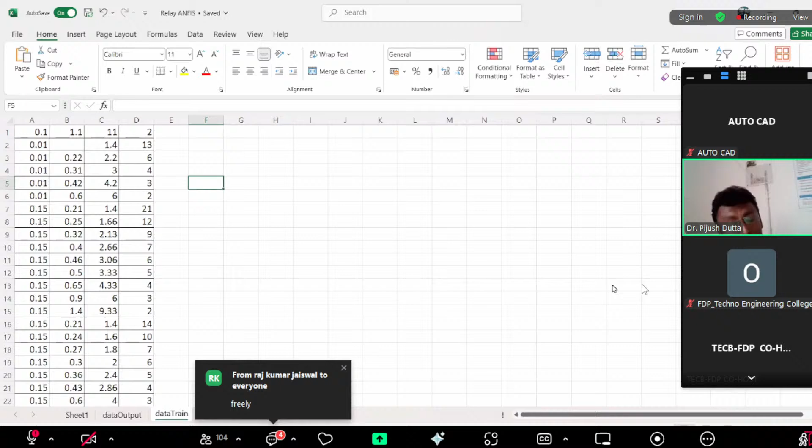At the same time, if I further tune the ANFIS, like the membership function of the fuzzy inference system, in that case I also add PSO-ANFIS, or you can use GA-ANFIS, that is particle swarm or genetic algorithm integrated with fuzzy ANFIS, or flower pollination ANFIS, bat ANFIS. This kind of optimization algorithm can also be used for further tuning of the fuzzy inference system in an ANFIS model. I have already performed this kind of optimization research.

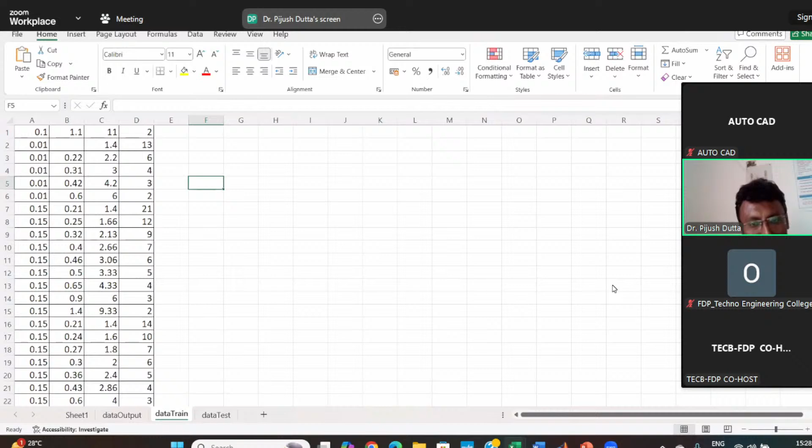But as my session is regarding simulation, I will avoid this part.

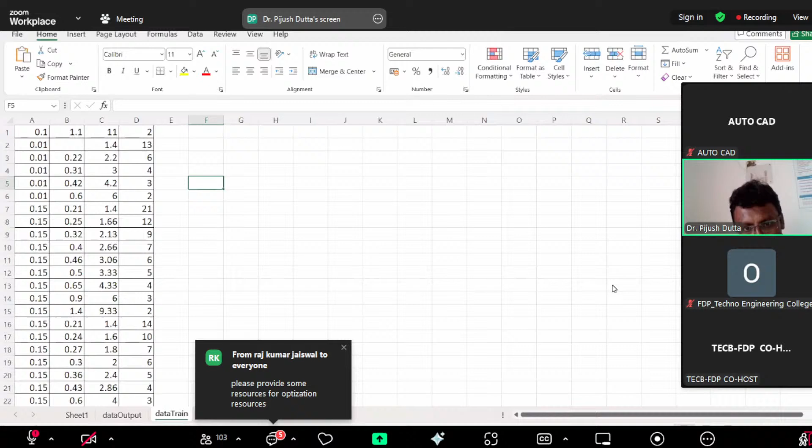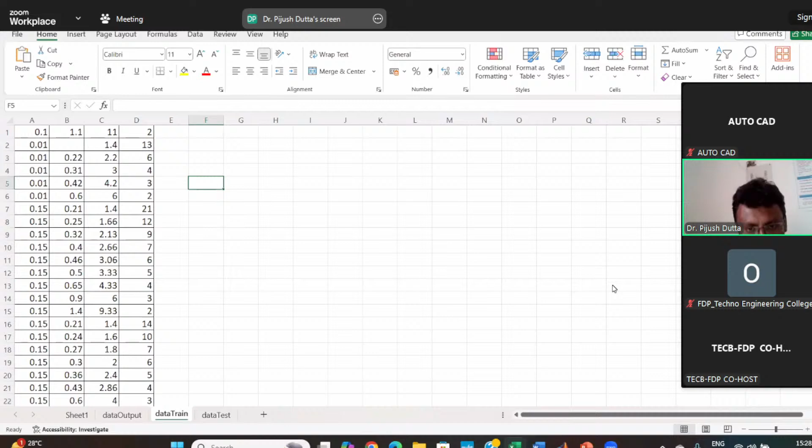Actually, in optimization, some sources mean that in the MATLAB library you can get the code, but this code is not actually viable as is. You have to change the code according to your requirement. If you know programming languages like C or C++, and you have experimental data, you can change the metrics of these already available algorithms.

But some algorithms you can also design, like implementing two algorithms, for example elephant swarm optimization - these are actual hybrid algorithms. Some algorithms also use a hybrid of evolutionary algorithms, like genetic algorithm and particle swarm optimization. Generally, in most cases, some algorithms can provide the optimal result because they give very fast convergence speed.

After executing the instruction, it very quickly reaches a stable condition. In some cases the algorithm takes a longer time, so I can choose two algorithms and merge them to get a hybrid algorithm. This kind of algorithm can be implemented according to the nature of your experimental data, so there is no particular single source for the optimization algorithm or MATLAB tool.

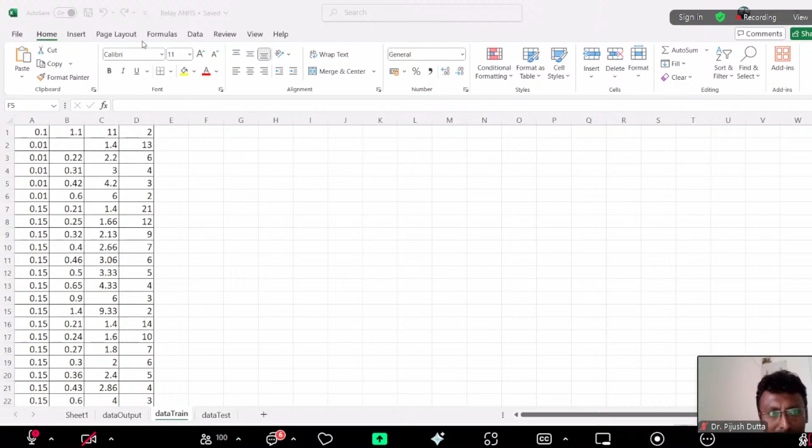Thank you, madam. Can I leave? Thank you, sir. Yes, sir. Thank you all.

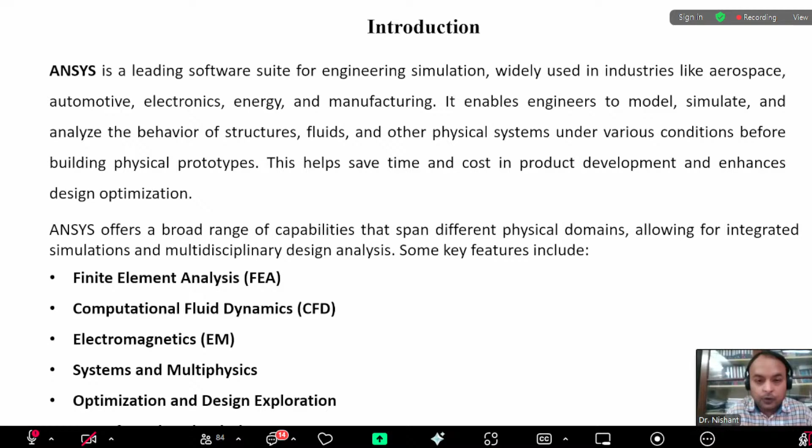It also deals with fluids and other physical systems. For fluids, computational fluid dynamics is an important analysis in ANSYS, which we will discuss in this session, along with other physical systems under various conditions before building physical prototypes.

Suppose we have developed a prototype and fixed the boundary conditions depending on our need - the need of the industry or the need of research - we simulate it using this ANSYS tool with the help of either FEA, finite element analysis, or CFD.

So why is it necessary to simulate such prototypes before doing an experiment or going to field work? Because it helps researchers and industry - it saves time and cost, both of which are very important in product development, and it enhances design optimization of the system.

ANSYS offers a broad range of capabilities that span different physical domains, allowing for integrated simulation and multidisciplinary design analysis. Some key features include finite element analysis, computational fluid dynamics, electromagnetics, systems and multiphysics, optimization and design exploration, and manufacturing simulation. There are many more, but these are the key features of ANSYS design analysis.

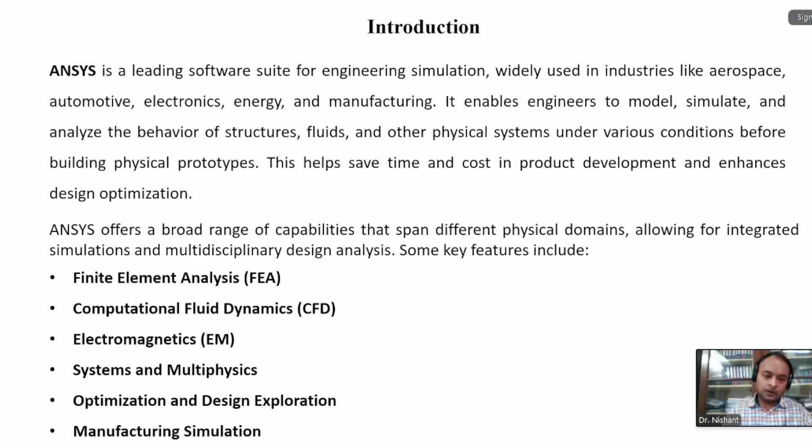When we start and go to ANSYS, the basic thing we need to know is ANSYS Workbench. So what is ANSYS Workbench? It is developed by ANSYS USA.

It is a computer-aided finite element analysis tool. In the graphical user interface of ANSYS Workbench, the user can generate a 3D and finite element analysis model, perform analysis, and generate results of the analysis.

So when we go to the workbench of ANSYS, we see there is a list of analyses that can be performed in this tool. The first one is design assessment - the assessment of the design can be done in this analysis in ANSYS.

Then there is electric, explicit dynamics, fluid flow, fluid flow CFX, and fluid flow fluent. There is a minor difference between CFX and fluent or fluid flow, which we will discuss in the coming section.

Then harmonic response. Next is IC engine - if we go for the IC engine, detailed analysis of the IC engine can be done using this analysis system of ANSYS. We also have linear buckling, magnetostatic, modal, random vibration.

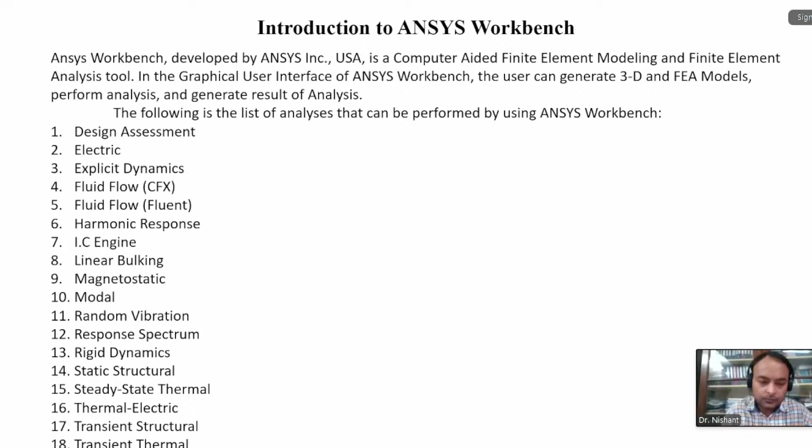Response spectrum, rigid dynamics, static structure - static structure is also one of the important analyses in ANSYS. Then steady state thermal, thermal-electric, transient structure, and transient thermal.

Now, when we start with ANSYS, how should we get this ANSYS onto our system? Before installing ANSYS on your system, it must have good configuration so that the simulation doesn't get stuck at the time of working.

It is recommended to have a system with good RAM—more than 4 to 5 GB is basically needed for ANSYS—and a good operating system. The latest, if you have Windows 10 or 11, you can use this ANSYS system onto your system very easily. Besides this, if your system provides a good graphic card,

that will help to analyze the good picture of the simulation results, which can be visible in a very good manner. So the graphic card is also one of the most important components for your system to install ANSYS in your computer or laptop, whatever you have.

So when we go for the ANSYS workbench, when we go for the start, we see the workbench. Now, from where can we download this ANSYS? This is very important. From the official website of ANSYS, we can use the student version of ANSYS. The latest version is also available there. You can go through it.

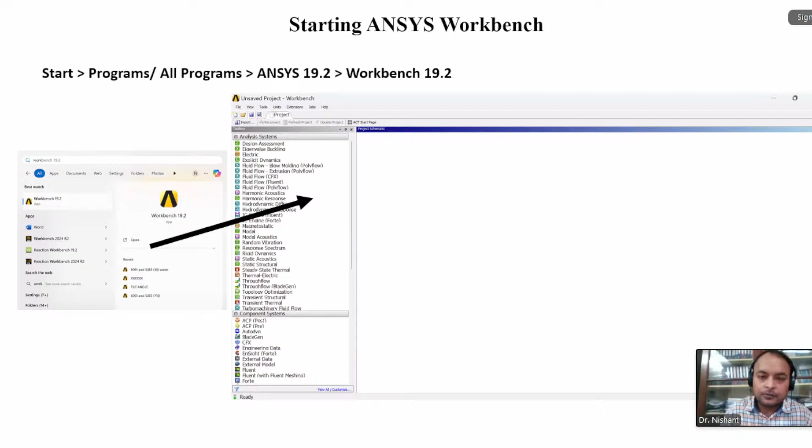These are some of the analysis systems, and beside that there is a component system. This helps the analysis system for further analysis. For example, there is ACP post, pre, Autodyn, CFX, engineering data, and so on. Whenever we click to the workbench, the window will look like this, and we will go for the next slide.

So what does this window represent? This window represents, first, the title bar, where you can rename your data, where you can rename your file or save it with whatever name you want.

Then in this title bar, there is a menu bar, which has File, View, Tools, Unit, Extensions, Jobs, Help. In File, we can open it, save it, as we can do in a particular system—that's all the features available in this. You can open it, save it, export it, import it, whatever you want.

Similarly, there is the next section—the project schematic view window, or project schematic window. What is this? Whatever analysis system we are going to use, we will just put it into this project schematic window. How will we put it?

Just go and click, for example, if I'm talking about Static Structural—we go on Static Structural, just click on it, or we will drag it to the project schematic window. That window will open up a pop-up of a static structure, which has different menu bars in that particular pop-up, which we will see in the next slide.

Besides that, this is known as the toolbox—a toolbox in which the analysis system, component system, custom system, design process, etc. are represented. Now, one of the important things in this window is the status bar.

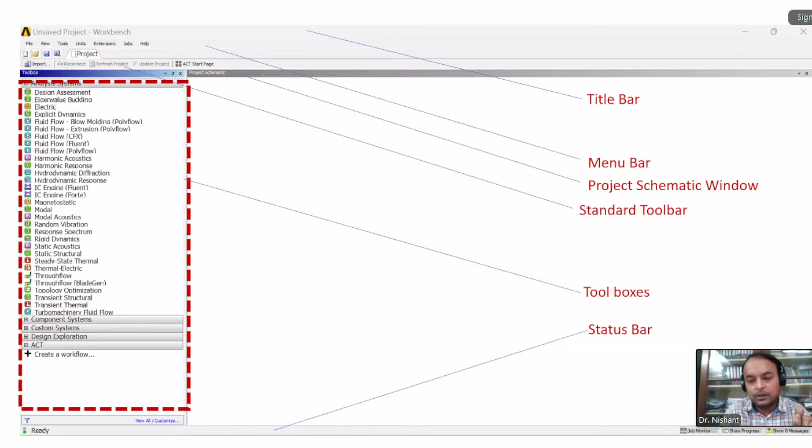What is the main error in your simulation? What is the main need? What do you want now? It will give a little hint to you at every point of your analysis.

Now, in the toolbox window, see on the left hand side we have the analysis system.

The first is the design assessment. What is it used for? It is used to perform a combined solution for static and transient structure analysis. Suppose a particular researcher has to perform a combined solution for the static and the transient structure analysis, then he or she will use this design assessment.

Similarly, for electric, it is used to analyze the steady state electric conduction. For explicit dynamics, it is used to identify the dynamic response of the component under stress wave propagation or time-dependent load or impact. Coming to fluid flow CFX, it is used for analysis of compressible and incompressible fluid, and to analyze heat transfer in fluid.

Next is the harmonic response. This is basically used to analyze the system working under periodic or sinusoidal loads.

The next is the IC engine. It will determine the performance of the whole system of the IC engine. You can use the prototype of the IC engine for whatever analysis you want to do. It will give the complete performance of the whole system. For using this, you can use Fluent or Forte, depending on the necessity of your analysis and the need of your research, which all depends on your objective.

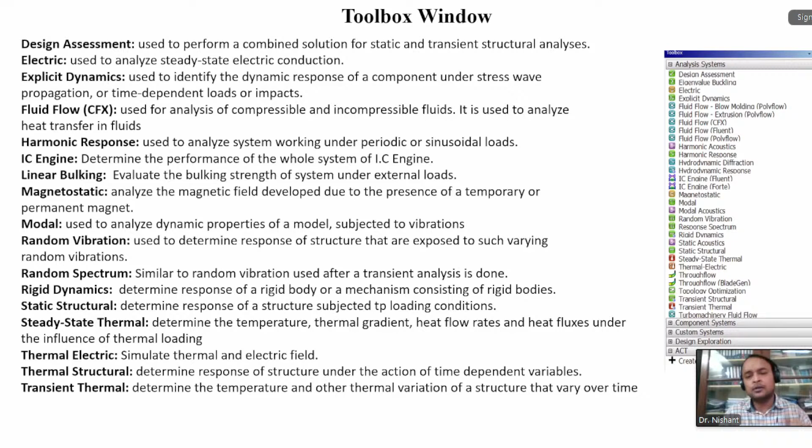So whatever analysis system the researcher or industry wants, you can simply click it and go for further analysis. Now, the next is the component system.

What is the use of this component system? These are the basic blocks of the project. Whatever geometry you have made, this is used to analyze systems such as geometry, which is used to create models for your analysis. Then we go for mesh, which is used to generate the FEA model. Then we use it to visualize the result of ANSYS in the desired form.

Next is the custom system. It is used to carry out a standard coupled analysis in which the input and output data of one analysis is used as input for the next analysis.

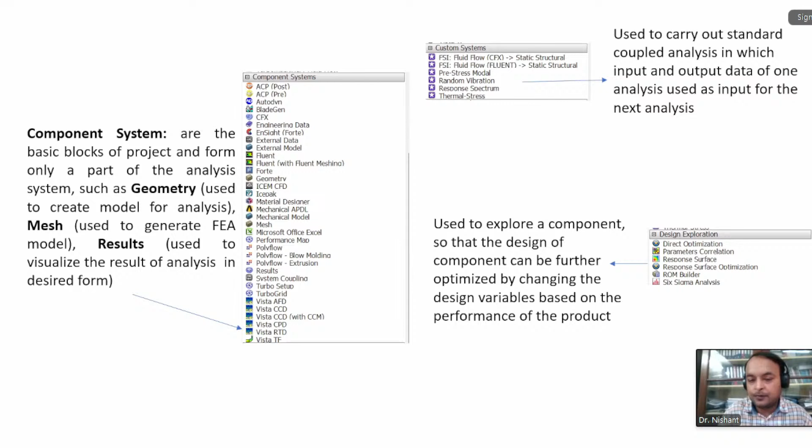There is one more section in the toolbox, that is design exploration. It is used to explore a component so that the design can be further optimized by changing the design variable based on the performance of the product.

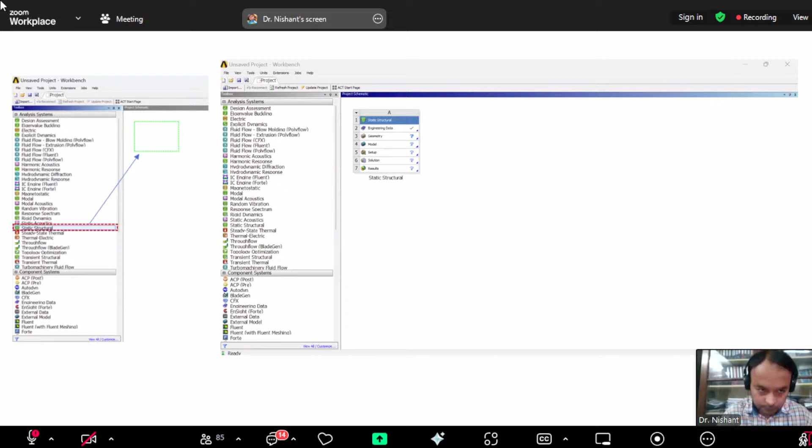This is the outlook of the ANSYS workbench. Suppose I have selected this static structure. When you click on it and drag it into the project schematic, you can see a green rectangular box has appeared in the project schematic.

As you leave your cursor after dragging this static structure, a pop-up will develop at the project schematic, which consists of 7 parts: engineering data, geometry, model, setup, solution, and the result. This is the overview. If anyone wants to go for fluid flow, harmonic acoustic, IC engine, modal, or rigid dynamics, the first step is to drag it to the project schematic and do further analysis.

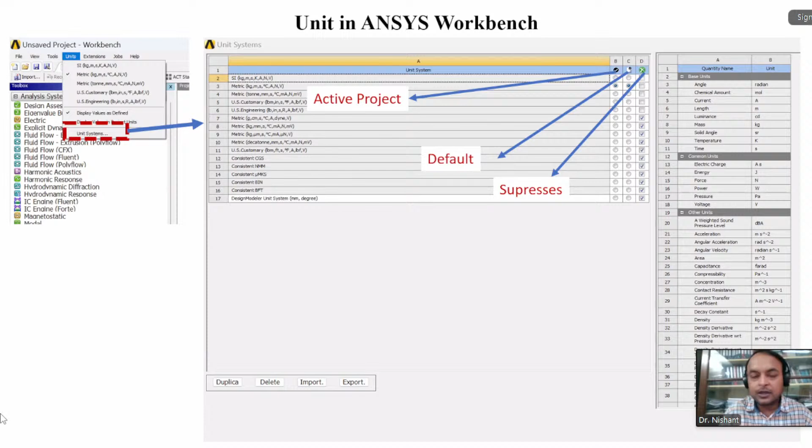First of all, when you open ANSYS, when you open the workbench, your first priority is to check the unit. Because if you do not take a proper unit, your data will not give the proper result.

Now, some components of that system: first is engineering drawing. What is this? Engineering data. Then second is geometry, model, and mesh. Model is something that meshing is under. There is a term known as meshing. Meshing means to mesh your particular product into small elements with the help of elements and nodes. Then setup, then solution, and finally the result.

So the engineering data cell is used to define the material to be used in the analysis. Whatever design you are going to analyze in ANSYS, you have to define the engineering data, the material of that product, whatever analysis you are going to do. For that, you have to use this engineering data.

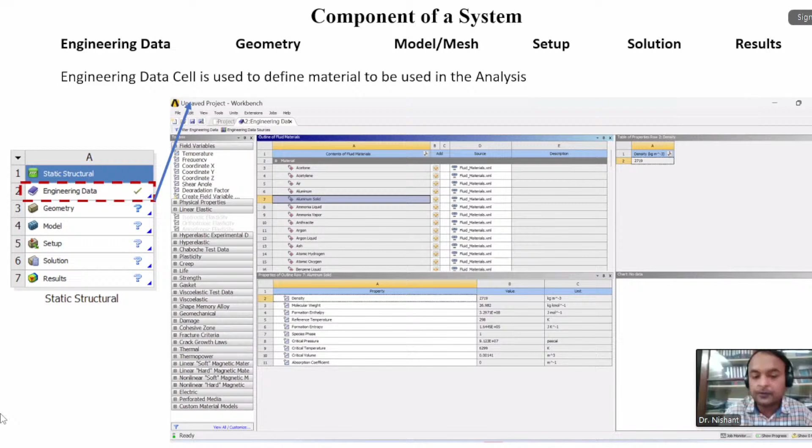Here it shows the density, it shows the molecular weight, it shows the formation enthalpy, it shows the reference temperature, it shows the formation, whatever. If your value is given in this engineering data system, you can also see what value is given to the particular aluminum solid here.

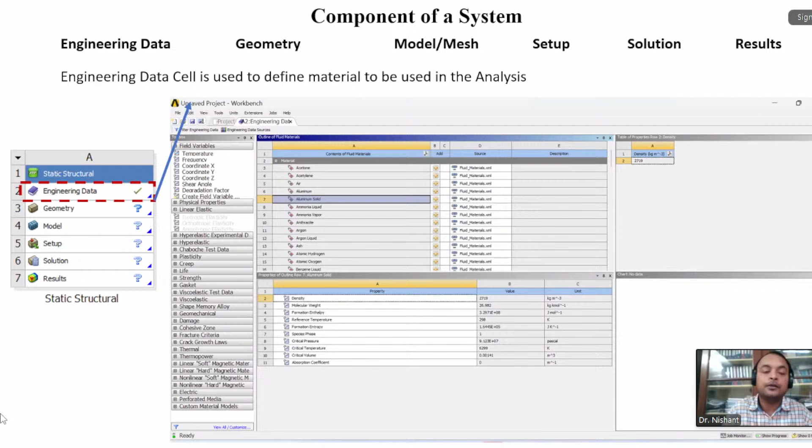If you are working on a new material, you can also introduce your new material and define whatever the mechanical and chemical composition of the material is.

Coming to the geometry. What is geometry? It is used to create, edit, or import the geometry used for the analysis. When we right click on the geometry, we see new SpaceClaim geometry and new DesignModeler geometry. These are the two interfaces given in ANSYS to create or edit your geometry.

To create a geometry, you can use new SpaceClaim or new DesignModeler. That depends on you, whatever you like. And if you have designed a part in SolidWorks or CATIA or any other software, you can also import that geometry.

For that, we have to come to the geometry, then you will see here is the import geometry option. You can browse the location, give the file location, and the geometry will be imported into this static structural geometry, and you can go for further analysis.

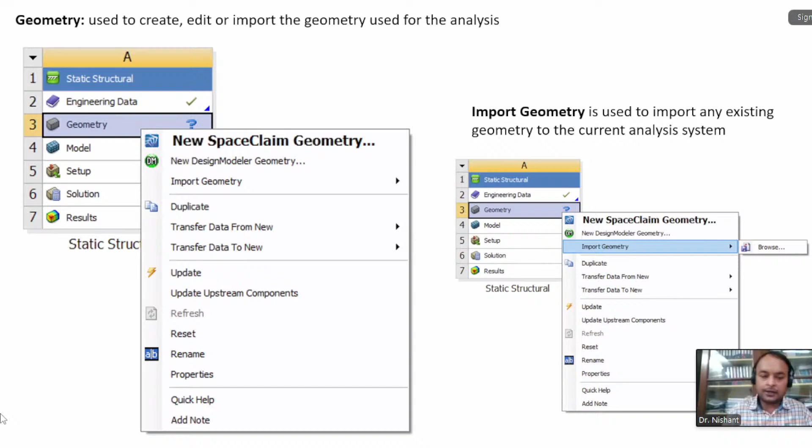Now, see, these are the model cells. What are the model cells? After geometry, there is a model cell. It is used to discretize the geometry into small elements, that is meshing, meshed into small pieces, small elements.

After you selected the engineering data, then you developed geometry, after that what we do is discretize the geometry into small pieces. That is known as meshing, with the help of elements and nodes.

And we apply the boundary condition and load condition to solve the analysis. The next is the setup cell. It is used to define the boundary condition of the analysis, such as load and constraint. If you are going to give a load, fix one side, or apply whatever your boundary condition is, that depends on your analysis. You can define it here in the setup cell.

After that, you go for the solution cell. In the analysis, the problem is solved based on the condition defined in the cell above, the setup cell. Whatever boundary condition you have given in the setup cell, based on that, the solution will solve your analysis problem. And next is the result cell, which displays the result of the analysis in a proper specific format.

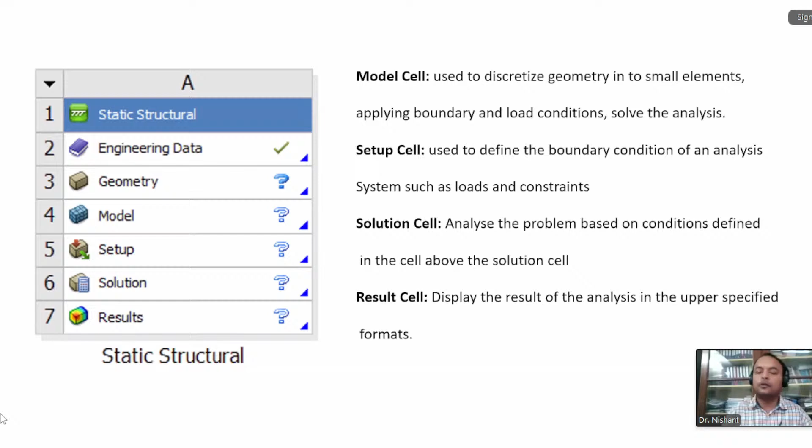Now, here is one thing we see in this pop-up: there is some notation, that is tick, question mark, filled question mark, tick, and so on. So what does it represent? We should know this. Whenever you see there is engineering data and a green tick sign, the tick sign represents the required minimum data has been set, and when you go for the static structural analysis, the engineering data is the predefined structural steel.

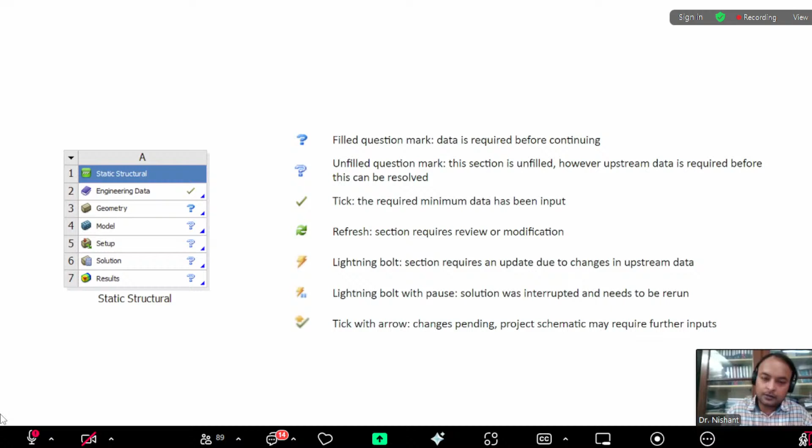If the notation is the filled question mark, what does it mean? It means the data is required before continuing. You can see here there is a green tick for engineering data, but in geometry there is a filled question mark, which means there is an absence of geometry in the geometry section. When we build or design a part into the geometry, that will also become a green tick, meaning the minimum data has been given to the geometry section.

Similarly, there is the unfilled question mark. This section is unfilled, however upstream data is required before this can be resolved. You can see in model, setup, solution, and result there is an unfilled question mark. It means that whenever the data must be fed to the geometry section, only then will the model, setup, solution and result work.

Similarly, there is a refresh option for a section that requires review or modification. At any time, if you realize you have missed something in a particular geometry, model, or need to give one more boundary condition to a setup, you just edit it, and whenever you give new data, you need the refresh section. It shows that refresh is necessary after each modification.

Or what review is required. The next is the lightning bolt: a section required an update due to change in upstream data, and a lightning bolt with pause means a solution was interrupted and needs to be rerun. A tick with an arrow means changes are pending; project schematic may require further input.

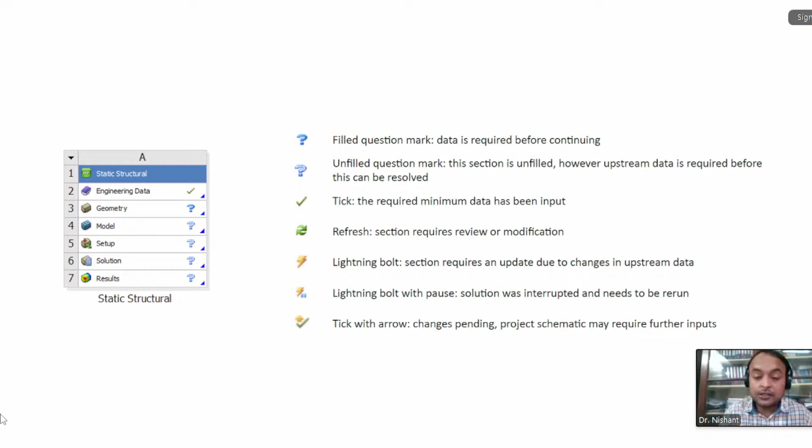How should we create geometry in this ANSYS workbench? When we drag the static structure into the project view and right click on geometry, we see new SpaceClaim geometry and new design modeler. As I've already told, ANSYS provides two interfaces for geometry, and both will look like this as shown in this slide.

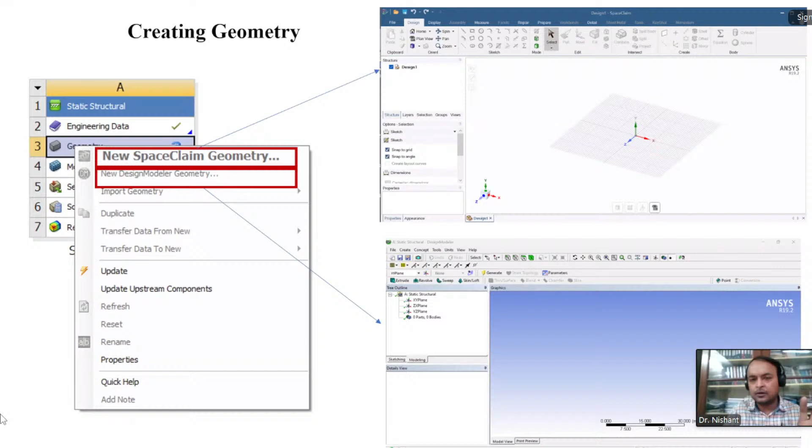And if you want, you can also import the geometry here. You can also import the geometry here. Suppose you have imported the geometry and need an update, you can also update it into this particular section. Coming to this...

I'll go for the design modeler geometry for this session. See how the design modeler geometry looks. It looks like this: static structure design modeler. There is a file, create, concept, tool, unit. Again, I am saying unit is a very necessary part. Whenever you go for this, you must check your unit. This is the first thing you should apply to your analysis.

Then on the left hand side you see the tree outline. What does this tree outline show? It shows the planes of this particular preview - XY plane, ZX plane, and YZ plane. These are the planes which we can use. Whenever you are going to design a geometry or a part in the system, you will select that plane by clicking over there.

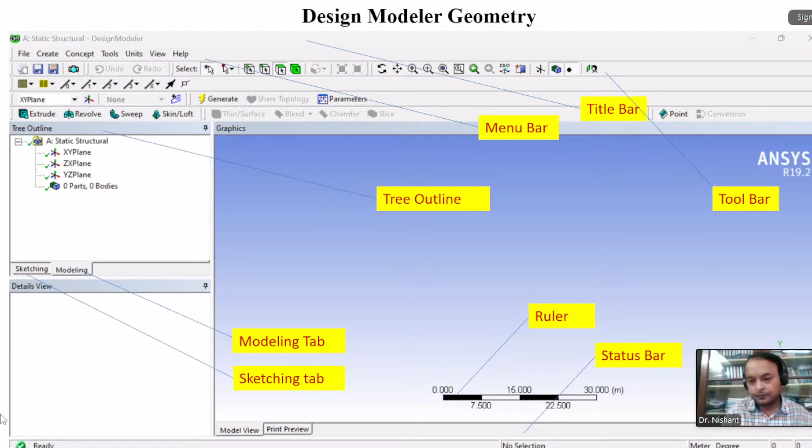Beside that, there is a menu bar, title bar, and a ruler. Yes, ruler - ruler is very important. This ruler gives the scale to this particular image. Whatever dimension you are going to use in the geometry depends on this scale. There are two more tabs: the sketching tab and the modeling tab. When we first go for a sketch, then we go for the model. There is a toolbar and so on.

Now, from the component system, you can also make the geometry. You can just slide this geometry to the project schematic and design your needed geometry with new design modeler geometry. And you can also SpaceClaim, you can use it, there's no issue. You can use this geometry - you don't need to make your geometry a second time. Just keep this geometry, put that static structural, and connect it with that geometry.

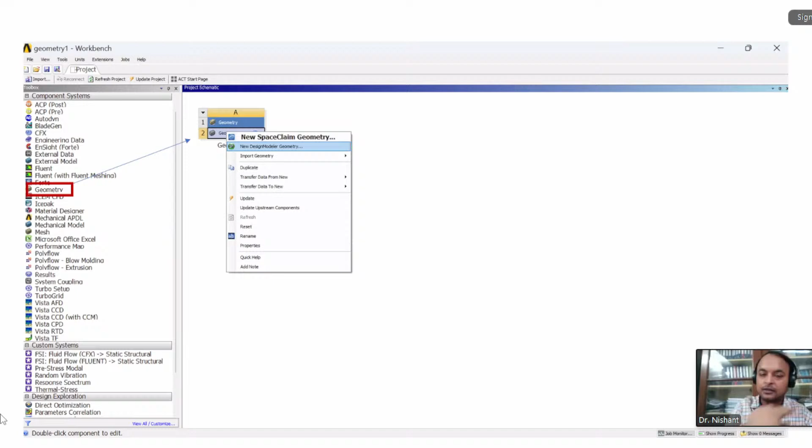Now, okay, how we will create, or how we will perform, a geometry section.

Suppose I have selected the XY plane. Whenever you click on the XY plane, this graphics will look like this. This is an isometric view.

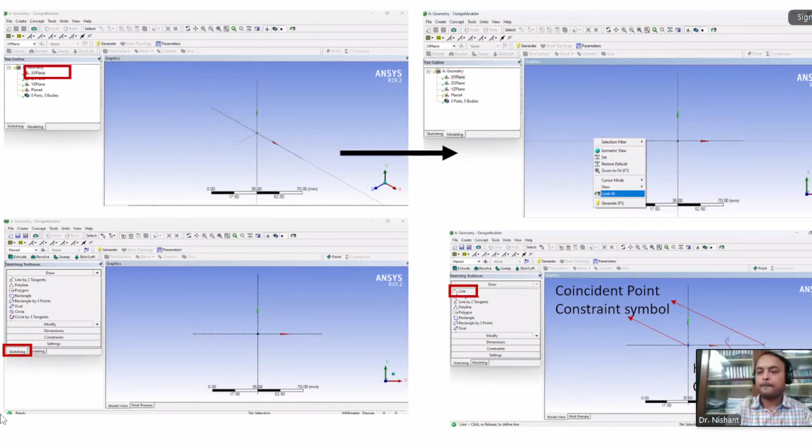You can go through that to 2D also by right clicking and looking at the option, or you can see at the upper part there is also the same logo. You can use that, or simply use this iso ball, this blue ball.

That is the origin, the XYZ origin. You can also use that ball and scroll with the help of your mouse, and adjust whatever way you want to look at your geometry.

Then after that, you have to go for the sketching. Click on sketching. Whenever you go for sketching, line, polyline, polygon, rectangle, rectangle 3-point - these options will be available.

Suppose you have selected the line. What happens when you draw this line on this particular XY plane? See, there is the origin, and there is the end of that line. You can see there are two symbols.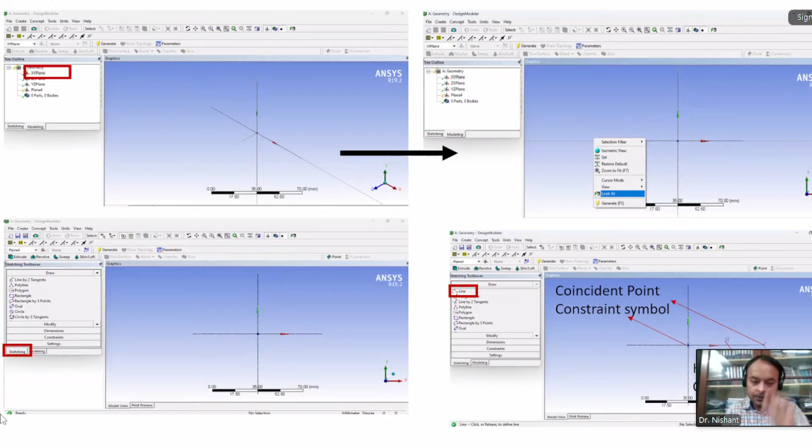One at the origin is known as the constraint symbol, and at the end is the coincident point. You see there is a written H - H represents the horizontal constraint symbol. If you drag the line in a vertical way, it will be represented by a V, which is the vertical constraint.

Now suppose you have drawn this particular model, drawn with the help of this design modeler and this sketching. Now see what you have done - I have just randomly selected a geometry, and we have used some symmetry. You can see some constraints, each equal distant, each symmetric to each other, and we have developed this.

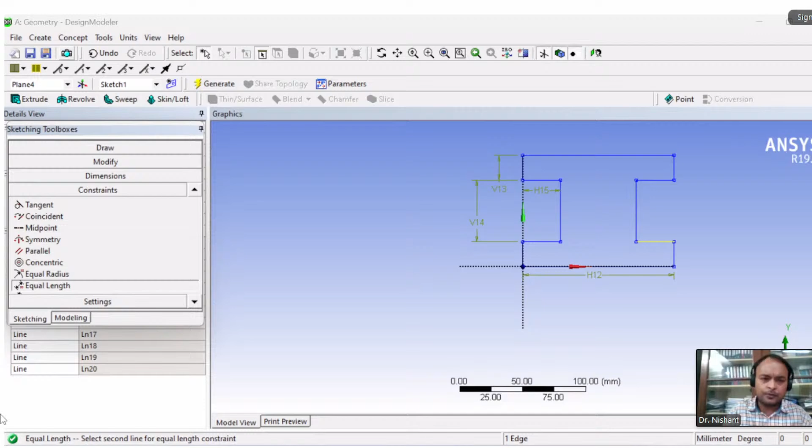Okay, next what do we do? What do we go for - the modeling. When we see the actual view, click on the ISO ball, view changes to isometric. Now what are we going to do?

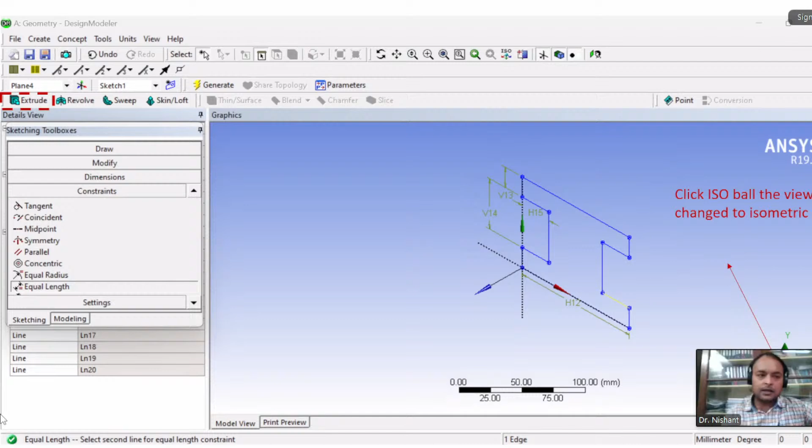We are going to extrude this. How are we going to extrude this? You just draw this image and come click, and at the upper point there is extrude. When you give the extrude option, it will represent like this.

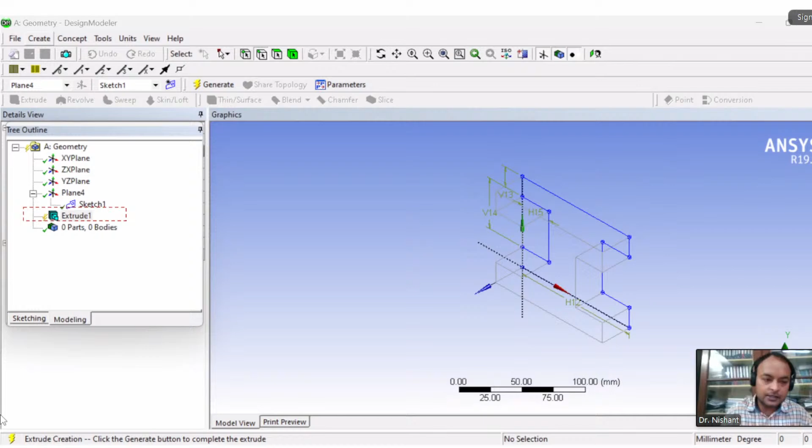The tree outline will show that sketch one has been extruded. When you click on this, that type of image will be seen in the graphic section. And the detail of extrude we can give here.

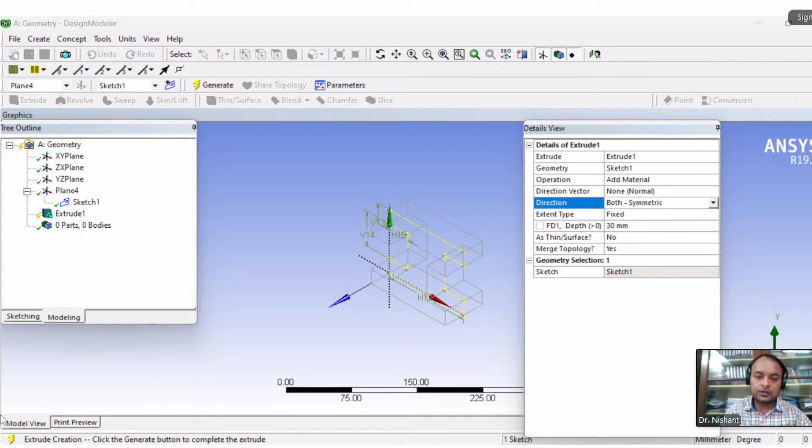We can give the direction. We can make it symmetric or unsymmetric, that can be given in the direction section. If we want the extent type to be fixed, we can use fixed. We can give FD1 depth, given as 30mm. Whatever details we want to give to this extrude section, we can edit here.

Now coming to the next - when you extrude, that geometry becomes one part. You see in the tree outline there is one part and one body. If you use two parts in this geometry, then there will be two parts, two bodies, and that depends on your need.

How much your model needs, how many bodies or parts you want to make here - you can also use several other tools such as revolve. If you want to make a cylindrical or revolving section, you can use sweep, skin loft, thicken, blend, chamfer, trim. All these are already given here. You can use based on what you need in your geometry.

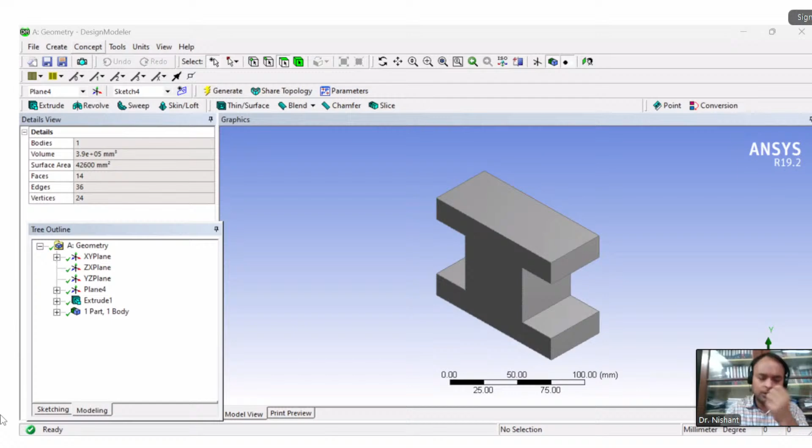Now next is the meshing. Suppose, as I already told you, you can just drag it from here. Suppose I have dragged it from here. Now I have made geometry in this section. What I have done...

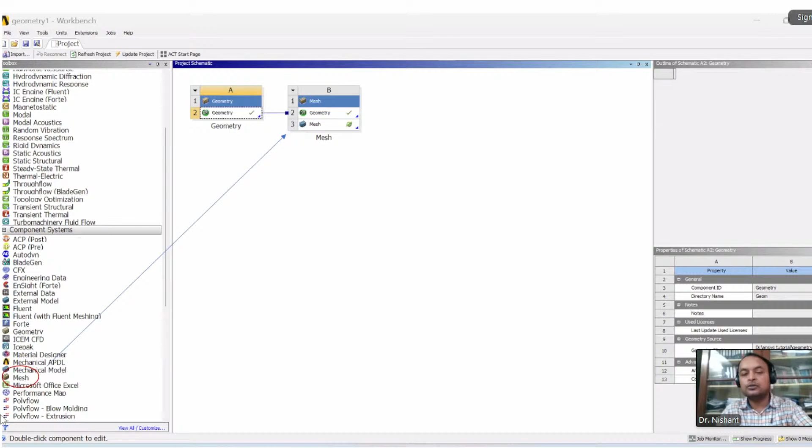I have dragged this geometry to another section. No need to make the same geometry twice in this section, at section B. Here we can go directly to the meshing - it's meshing, so that you can go for the refinement. Now coming to the mesh, generate mesh, it will give you detailed meshing.

You can use several meshing types, whatever you want, whatever elements, you can increase or decrease the elements. You can use whatever you need in this meshing section. You can also update.

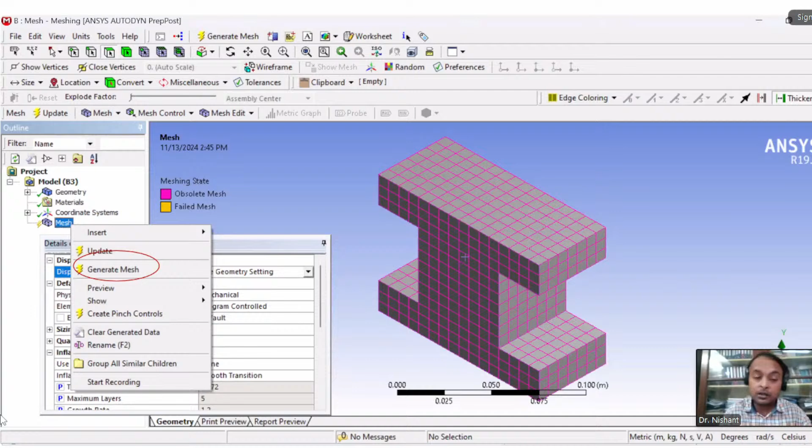If you are going to change this geometry once again, you will have to update. If you are going to change the elements, you have to edit the nodes, then update, and after updating you have to generate the mesh. Now coming to the first section, we will go for the finite element analysis.

The finite element analysis, what is this? It is a numerical technique for finding approximate solutions to boundary value problems for partial differential equations. As I already told in meshing, each part is broken into small elements, that is meshed into small parts. In simple terms, it is a method for dividing a very complicated problem into small elements, which can be solved in relation to each other.

First, we go for the pre-processing. In pre-processing, we define the geometry, do the meshing, and define the material properties. Defining geometry means creating a representation of a physical object, component, or structure to be analyzed. Whatever component I want to analyze, whatever I need for my research or analysis, I just have to create a digital representation in the geometry section.

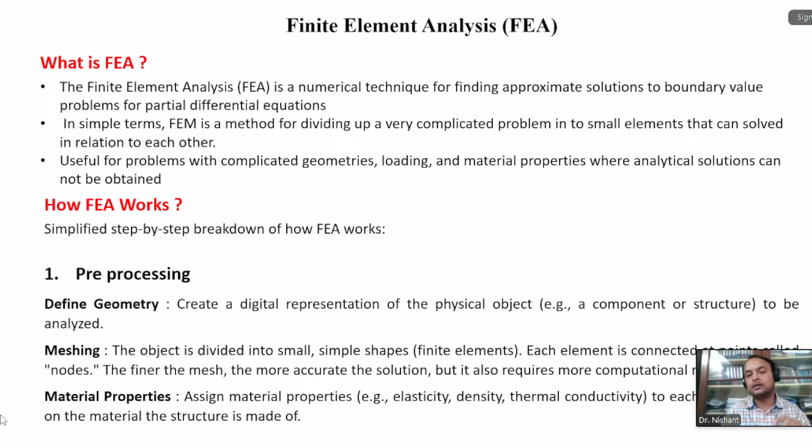Then defining the boundary conditions. This is one of the most important parts of FEA, finite element analysis. The boundary condition defines constraints and supports to your geometry - where the fixed points are, where the rollers are, whether they are symmetric or not symmetric - to determine how the structure is held or interacts with its environment.

The load: applied external force, pressure, temperature, or other loads on the system where they interact with the materials. These could involve mechanical, thermal, or electromagnetic loads. That all depends on whatever you need for the analysis.

After pre-processing, there is the solution process. For the solution process, you need the formulation of the system of equations. It uses the governing equations of physics, such as laws of motion or thermodynamics. This results in a large system of equations that describe how each element will behave under the given load and boundary conditions.

Most of the error is due to this boundary condition - due to not defining the proper boundary condition or not defining the proper constraint. Because a little mistake in this boundary condition will show an error in the simulation system. So before you go for the boundary condition, you should give the proper value, proper constraint, proper support, proper formulas, and proper equations. You should have all these things set for the boundary condition, for whatever model you are going to analyze or whatever you are going to use.

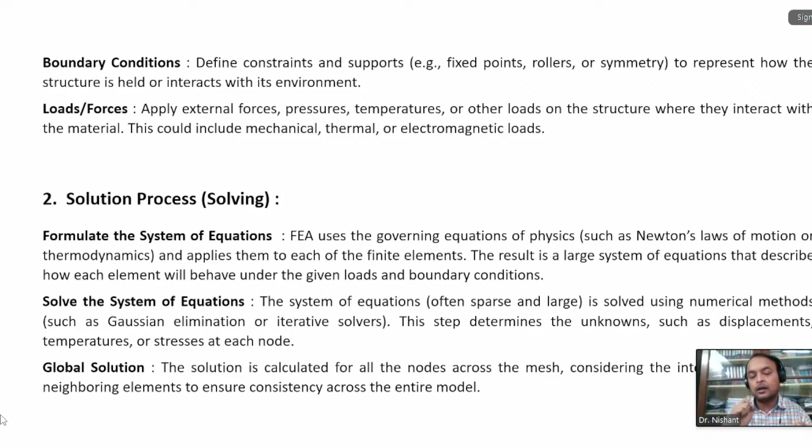Then we go for the post-processing, that is interpretation. Result visualization: the solution is plotted and visualized using color maps or contour plots to make sense of how the material behaves under load. Contour plots are just a color representation of the value given to the particular simulation figure, which you can analyze from this plot.

The next step is interpreting the result. The engineer analyzes the result to understand the behavior of the structure, such as maximum stress, displacement, and temperature. These key insights help identify weak points, failure risk, or areas of optimization.

Validation and verification: check the result for accuracy by comparing with experimental data and simpler analytical methods. Whatever data or result you have from the simulation software, whatever analysis you have done, you now compare it with your experimental data to see if it is valid. If it doesn't match, there will be a difference between the experimental and numerical results, but a small difference of 2 to 3 to 5% is acceptable.

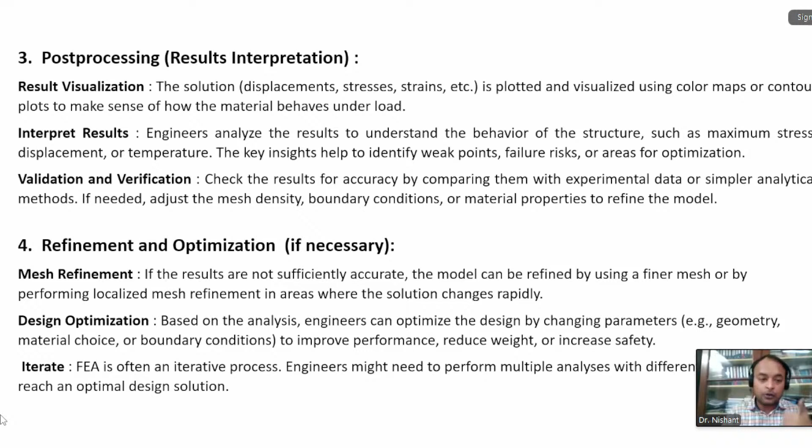Then, finite element analysis is often an iterative process. The engineer might need to perform multiple analyses with different parameters to reach an optimal design solution. You don't need to go for physical experiments long term; you can do it based on simulation because you have already validated your model with the numerical experimental data.

Now, what type of engineering analysis can we do using FEA? The first one is structural analysis, which consists of linear and non-linear models. The linear model uses simple parameters and assumes the material is not plastically deformed, while stressing the material past its elastic capacity causes the stress in the material to vary with the amount of deformation.

This is one picture view of the structural analysis used in ANSYS. For vibration analysis, it is used to test a material against random vibration, shocks, and impact. Each of these incidents may act on the natural vibration of the material, which in turn may cause resonance and subsequent failure.

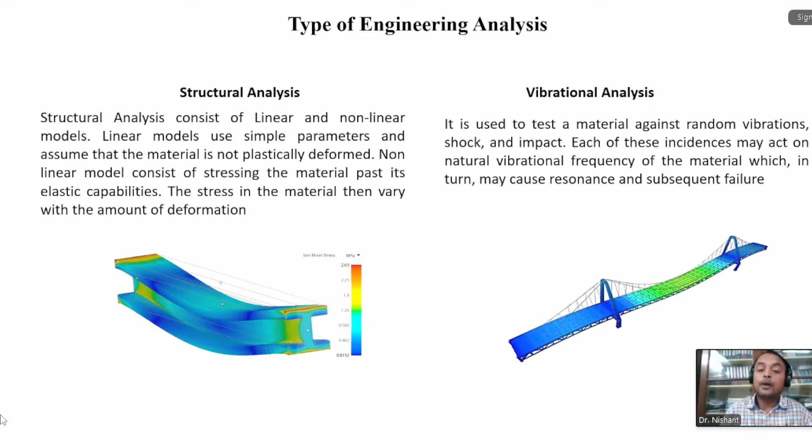Fatigue analysis can also be done using FEA. It helps predict the life of the material or structure and shows the effect of cyclic load on the specimen. Such analysis can show the area where crack propagation is likely to occur, and failure due to fatigue may also show the damage tolerance of the material.

You can also go for heat transfer analysis, which covers the conductivity or thermal fluid dynamics of the material or structure. It consists of steady state or transient transfer. Steady state transfer refers to constant thermal properties in the material that yield linear heat diffusion.

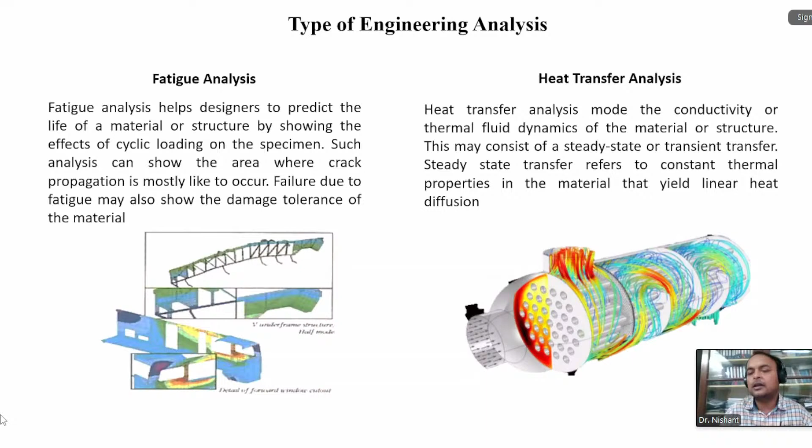Now, how will we do FEM in ANSYS? How will we apply this finite element analysis in ANSYS? Similarly, we will go for structural analysis. We will drag it to the project schematic, and in the project schematic we will go for the engineering data. What is engineering data? We will define the material we are going to use for this model. For example, here you have engineering data plus, so in the workbench, when you click on this, that is the engineering data fill.

There will be a list of materials, and in this section you can see structural steel material is being selected. This is predefined material given by ANSYS. Whenever you do not assign any material, it defaults to structural steel. You will always see a green tick in the engineering data in ANSYS, meaning that it is predefined as structural steel.

Now you can change the material properties if they are not the same. Suppose you want the value of Young's modulus to be less or different, you can change it here and give the details of the engineering material data you are using for your analysis. You can just edit and put it here.

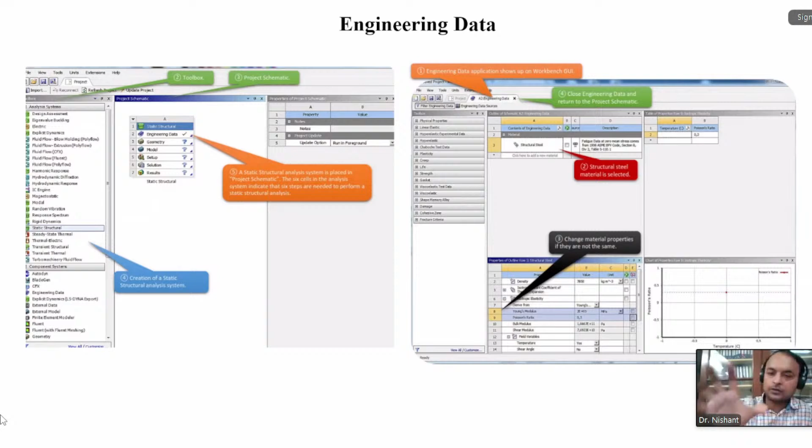After doing this, you just close this engineering data system and come to the point of geometry.

First of all, we will go for the unit. Always remember to change the unit before starting sketching. After selecting the unit, suppose I have drawn a line - you can see here I have made a rectangular section. You can change the dimension by clicking here in the dimension section, or edit whatever you need.

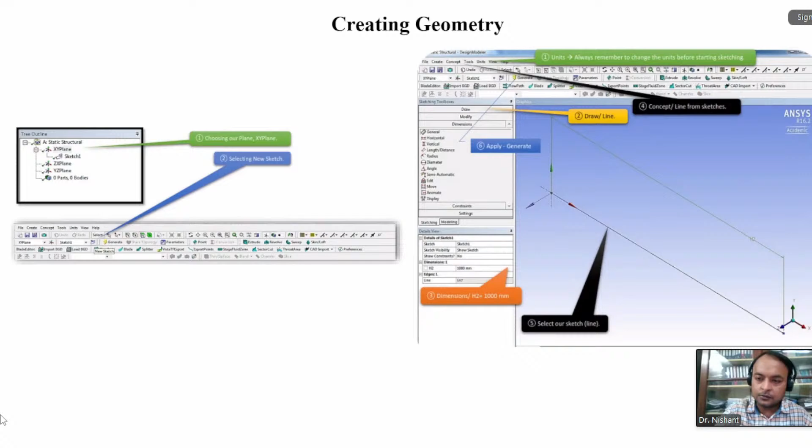It is the dimension of this section.

Now, next, if you are going to give a circular section - suppose I want to make this rectangular section circular - for that, what I do is go for the concept and go for cross section. Here you have a lot of cross sections, for example rectangle, circular tube, channel section, I section, whatever section you want, you just click on it. That line will be changed into the circular section. For example, here the circular section has been selected.

Now, when you go for this circular section, there will be a detailed view of the circular section where you can define the radius.

Now, coming to the sketch, when you do this, there will be a part and the body will be represented in the tree outline, in which if you go for the line body, you can see the cross section is circular - you have also selected here what your cross section is. Then whatever the section of your geometry will be, that will be converted into circular, with the radius you have defined.

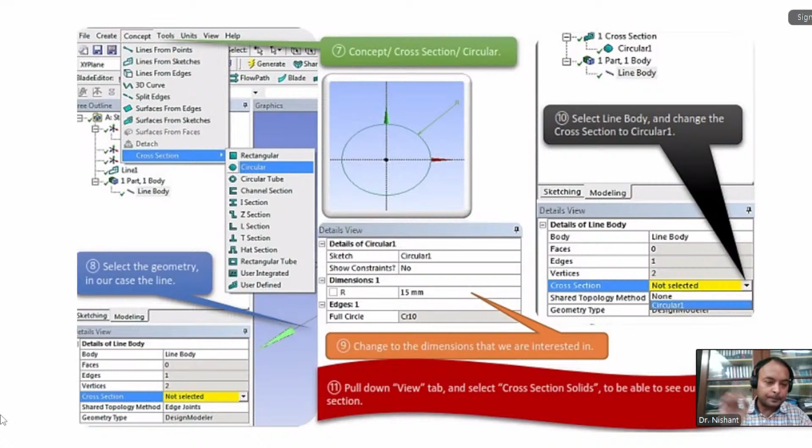Next, after doing the geometry, you just close that window and go for the next step, that is model, that is meshing, where you will go for the meshing.

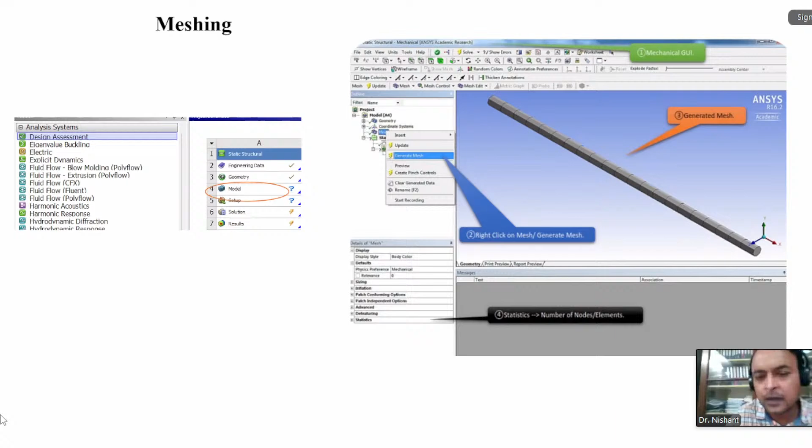You can also define the details of the mesh by clicking here. When you click on the mesh, you will get the details of the mesh. In statistics, you can change the number of nodes, change the number of elements, and whatever else is needed. You can edit the number of nodes and elements in the statistics section.

Now suppose I have done this - I am going to do the analysis. In this structure, static structure analysis, I have made one end fixed and applied a load on the next section. In this circular rod, I have made one end fixed and applied a load on the other.

Okay, how will we do that? We will go for the static structure analysis in the setup form. Now what we will do is first click at the end point of the circular section which we have to fix, and we will select the supports. Here you can see supports, and we will use this fixed support - that point will be fixed.

If you want another option like remote displacement, frictionless support, cylindrical support, or simple support, you can change it by going to the support section, whatever you want. Now second, you go for load.

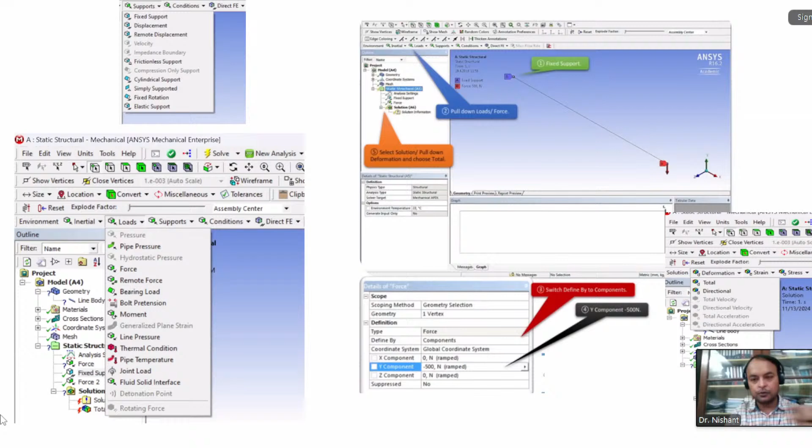Now go for solving the FEM. The time to complete a simulation depends on the problem size. Whatever the size of your geometry will be, the more complex the problem, the more time it will take. After the completion,

the numerical results are stored in the database. To solve it, just go to the solution and click on solve. Whatever you solve, the status bar will show each and every step of what is going to happen next,

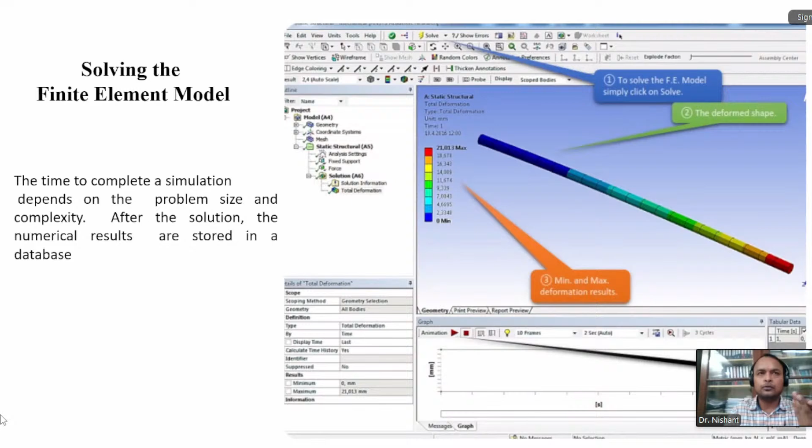and you will get this solution. From here you can see that we have got the maximum and minimum deformation data based on the condition and the force we applied to the rectangular and circular section. Now from here you can use the result, and whatever you want, you can do. Change the load, change whatever your requirement is, you can just choose it and get the data.

Now coming to the next topic, computational fluid dynamics. It is a set of numerical methods applied to obtain approximate solutions of problems of fluid dynamics and heat transfer.

It is not a science, but it is a way to apply the methods of one discipline to another, for fluid flow, mass transfer, and heat transfer. Sometimes, for the analysis of temperature and material flow, for fluid dynamics and heat transfer, you need a

user-defined function. What is a user-defined function? A user-defined function is just a code written by a particular user for what he wants defined, in which he defines the particular set of requirements he wants in a particular way regarding that fluid and heat transfer.

It is because there are many engineering projects that cannot be solved by analytical or experimental approach. There are many engineering problems which can't be solved by analytical or experimental approach, or if they can be solved by experimental approach, it is too

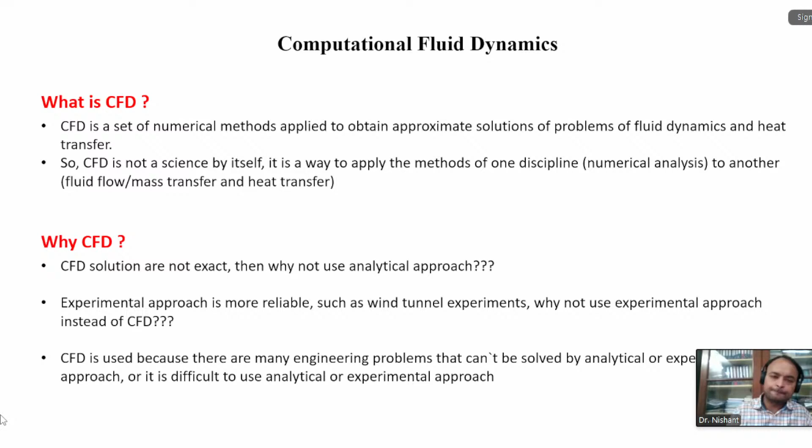What are the applications? Where is CFD used? It is a very powerful technique spanning a wide range of industrial and non-industrial fields. Examples include aerodynamics of aircraft and vehicles, drag and lift.

As I already told you, what happens in real life in the aerodynamics of an aircraft is very complex to analyze at that point. So these are the applications of CFD, where CFD can be fluently used as a powerful technique.

Next, power plants, combustion in internal combustion engines or gas turbines. These are among the best applications of CFD.

Hydrodynamics of ships, biomedical engineering, blood flow through arteries and veins - this is also an important application of CFD where it is used. Engineering environmental studies and distribution of pollution.

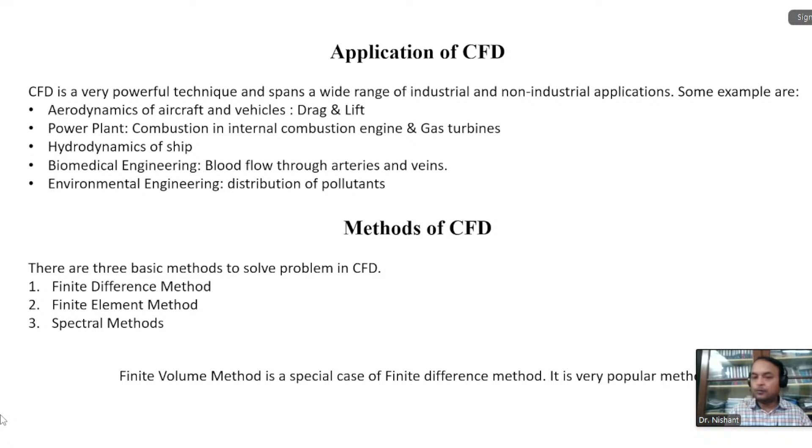What are the methods of CFD? There are three basic methods: finite difference method, finite element method, and spectral method. Each method has its own specification, but the most common and the special case of finite difference method is finite volume method. It is a very popular method - ANSYS Fluent.

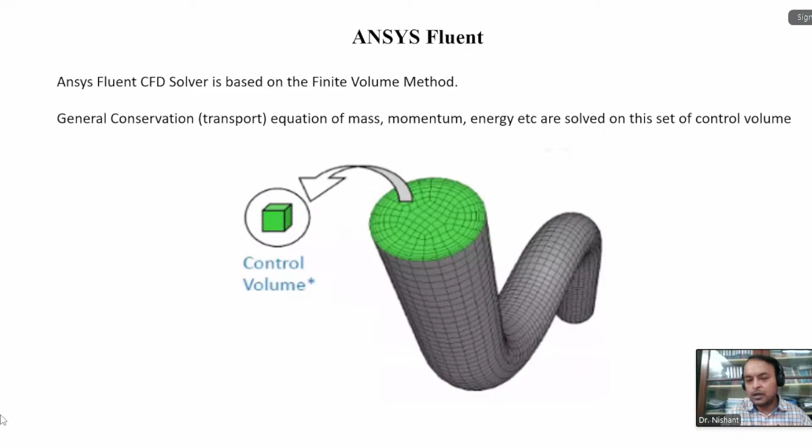What are the steps for ANSYS Fluent? Similarly to what we used in finite element analysis, the common steps are pre-analysis, geometry, and meshing. But the physical setup, numerical solution, and verification and validation differ. In setup, the boundary conditions are different, and user-defined functions are applied. The solution approach is also different, used for both fluid and solid in this CFD analysis using ANSYS Fluent.

How will we use ANSYS Fluent? In the analysis system, you go to fluid flow and drag it to the system. We will use ANSYS here in the simulation tool, Workbench. You control this tool from here. All your simulation tools are accessible with a single interface. Just click, drag it, or double click.

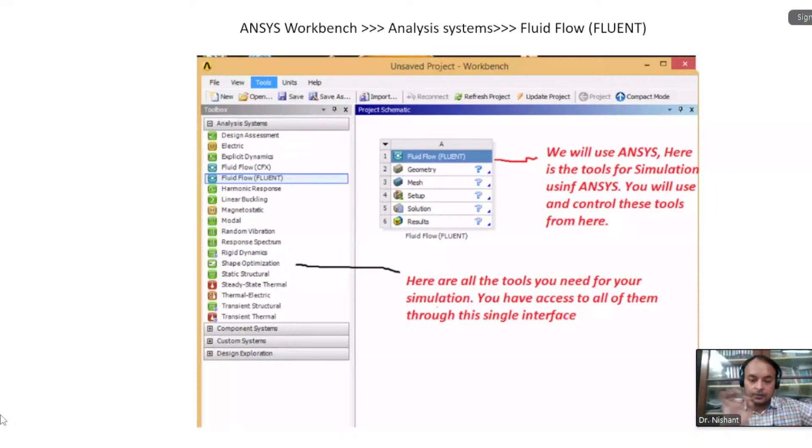Now here, one is the body, which is the workpiece, and the second is the tool that is plunged. These are the two bodies, as I already mentioned in the previous slide—there can be two or more bodies. In this section, I have used two bodies: one is the workpiece itself, and the second is the tool. We applied a Boolean subtract operation so that the tool is subtracted from the workpiece.

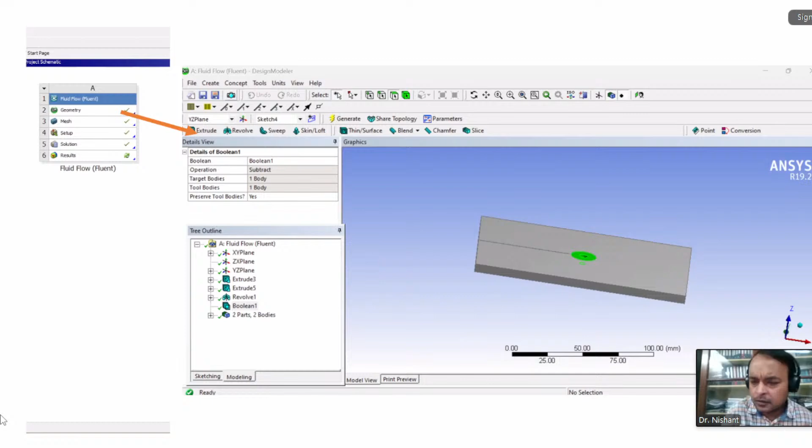Now we have two parts. We have the workpiece—see, this is the workpiece—and the second part, this is the tool. These are the two parts which I have defined in this geometry section.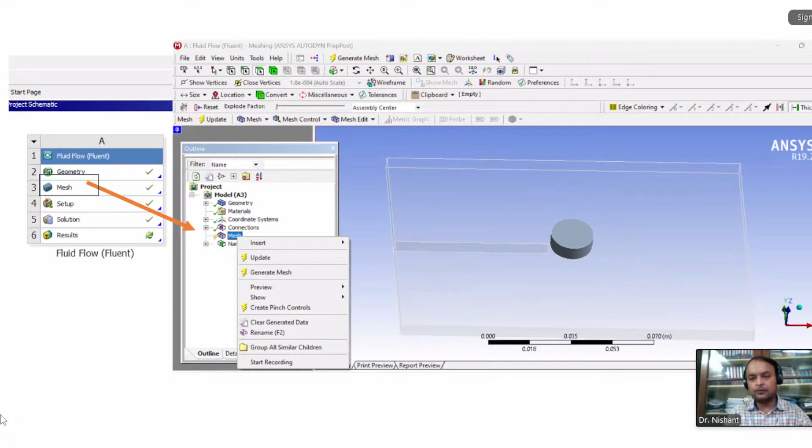Now coming to mesh, we go to generate mesh, and we see the structure has become like this. When we generate the mesh in this section, we see there is a meshing entry in the outline tree. A number of nodes and elements have been meshed, and the meshing operation has been completed for this particular FSW process on the tool and the workpiece. Now the next important step is the named selection.

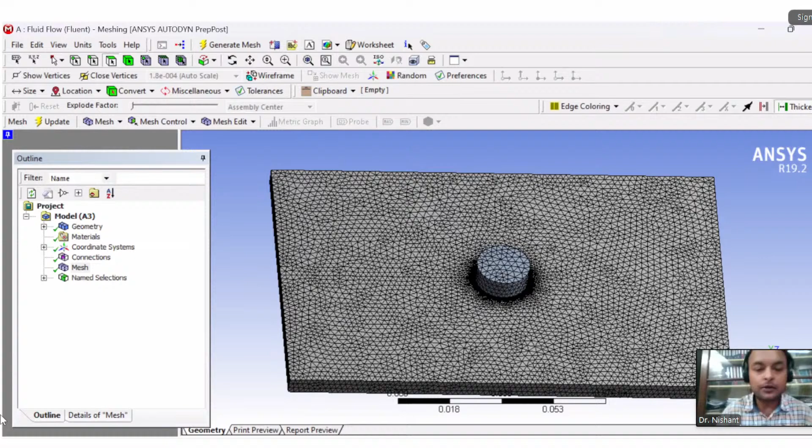What is the named selection? In the named selection, we name each and every edge of the plate, tool, and workpiece. For example, the red arrow shows the inlet of the 6061 material. Similarly, on the next side, we have the inlet of 5083. The outlets on both sides are the same.

We have defined the sidewall by clicking on the sidewall option. From the top surface and bottom surface, where the workpiece and tool interface, we defined and named them: workpiece pin surface interface, workpiece base interface, tool base interface, tool pin interface, tool shoulder. Each and every part has been renamed so that during analysis, I get a clear view, and when applying boundary conditions, I can clearly identify the inlet, outlet, sidewall, top surface, and workpiece pin surface interface—each and everything.

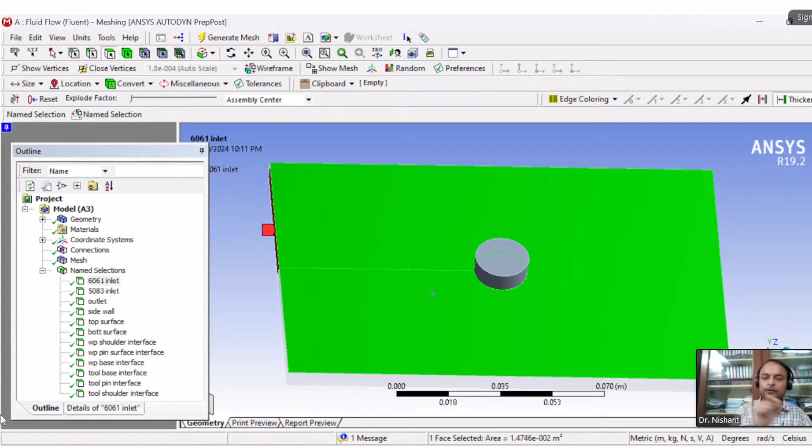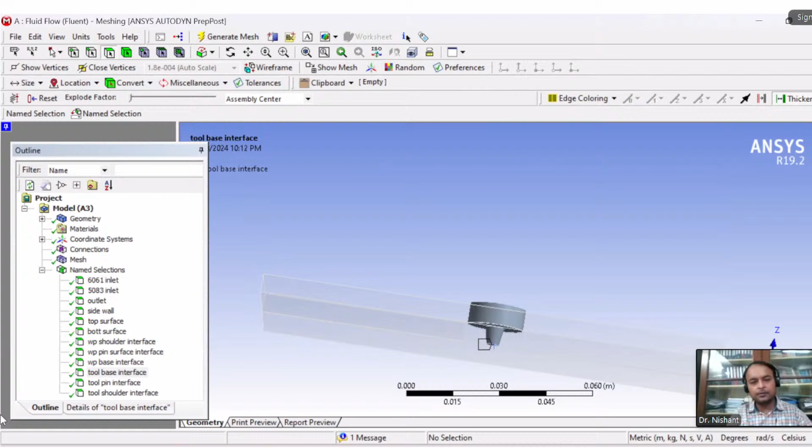Now, similarly, how will we select the tool section? We scroll our mouse using right click or the scroller, and select the tool pin and rename it as tool pin interface, tool base interface, and so on. Then we proceed to meshing, and the meshing has been performed.

And now we have applied boundary conditions in the setup for each and every tree: what is the base material, what is the dimension, what is the material, what will be the tool rotation speed, what will be the welding speed, what feed is given to the tool, and all the formulations—general equations of energy, momentum—and how the tool interface interacts, and what is the condition of that tool.

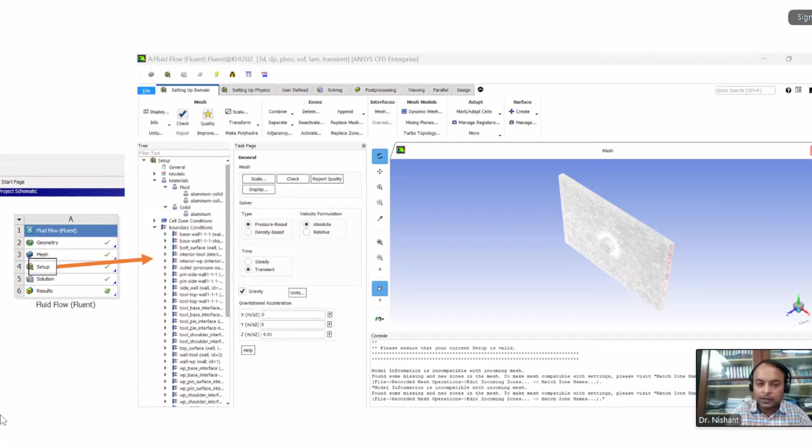Each and everything has been assigned in the boundary condition, and you can see here is user defined. Before solving, we have defined a user defined function using a code of C language for the analysis of material flow and temperature generation. We go for post processing, viewing, and then we go for the solution.

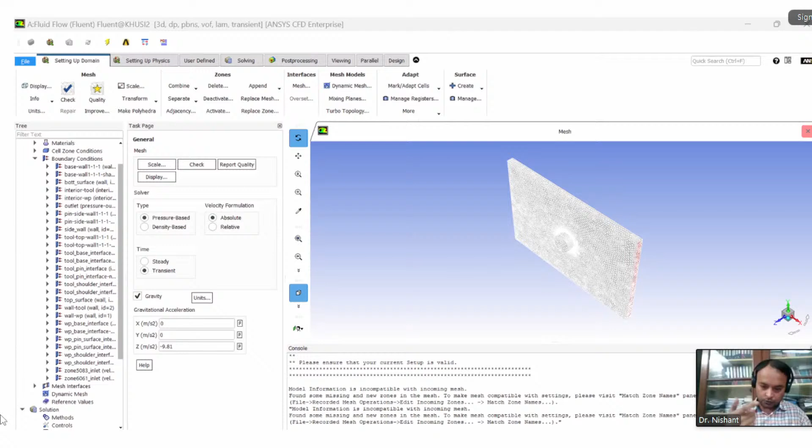As we go for the solution, as the simulation starts, each and every step of the simulation is going to be written here, and the status bar will show. If you have any error, the status bar will indicate what is the error, why your simulation is not running, and the main reason. You just go and check it, then you can solve your process.

After this, you can go for and use the result. For example, I have used the result of the velocity streamline. It shows the complete velocity streamline of this FSW process, giving you the minimum and maximum streamline values. From here we can generate the temperature data, generate the material flow velocity, and see the interaction of how the material flows. We can also play the animation, depending on what analysis we are going to use for your particular section.

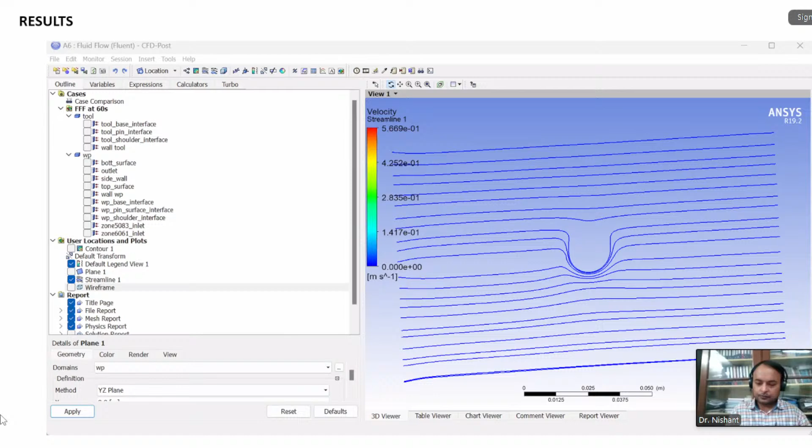Okay, this is a small talk over the FEA and CFD. I tried to cover up the important topics in this section. If you have any question, you may ask. Thank you.